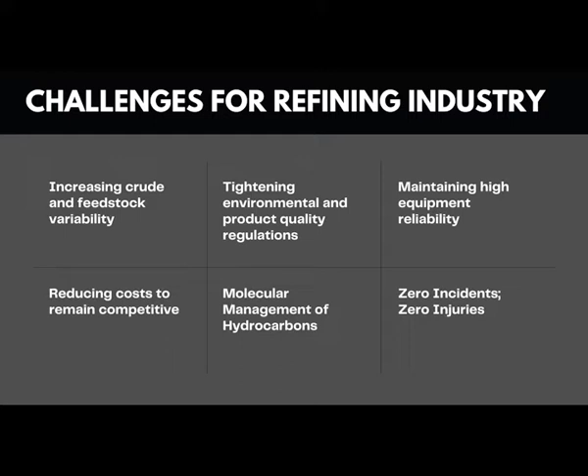The fifth challenge will be the molecular management of hydrocarbons. What does it mean? So today, splitting the crude oil into various petroleum fractions alone would not be sufficient. We need to come out with several petrochemical components either in the refining campus or in the downstream petrochemical campus. We have discussed at length about the petrochemical industry in the previous episode.

The petrochemical industry has got a huge demand and it is going to give high returns on the income. So according to the petrochemical industry's demand, several raw materials need to be produced from the refinery. The last challenge would be to have sustainable operations.

What does it mean? Zero incidents and zero injuries. So the workforce needs to go back home in a safe manner without meeting with any injuries or any fatality. So accordingly, all safety aspects need to be taken care of, whether it is personal safety or process safety. So these are the current challenges for the refining industry.

Today, technology has become so powerful. When we mean technology, it is all related to IT and associated technologies like mobility, analytics, cloud technology, security, social media, then drones, robotics, etc. So the technology has become so powerful. In the refining industry, we need to identify the right use case so that this technology can be leveraged to a great extent, so that these current challenges of the refining industry can be taken care of in a smooth manner.

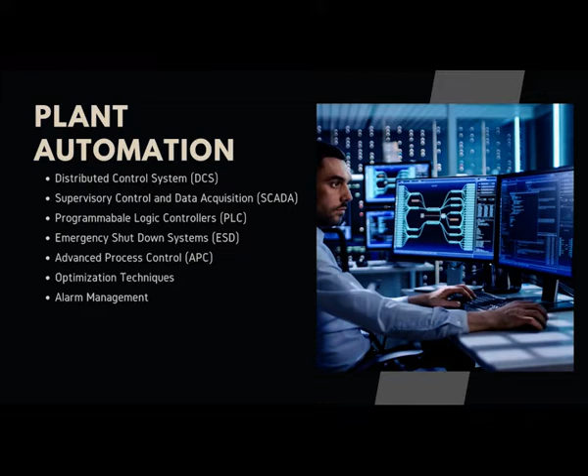So these are some of the basic stuff which are already in place, but today we are going to talk more about digital solutions, how the digital components can help the refining industry with the help of the technology. So first let us talk about analytics.

So today big data and analytics is a common topic across any industry, whether it is a banking or retail industry or an insurance industry. The oil and gas industry, especially the petroleum refining industry, is no exception to use the big data and analytics. So as I said in the previous slide, the refining industry generates a lot of data with the help of instruments. Not only from the instruments, we also collect a lot of data from the other assets like the fixed equipment and rotating equipment. So much of data is being collected, but how do we leverage all that data?

So only with the help of predictive analytics, we'll be able to leverage all the data that has been collected for so many years. For example, input from equipment through IoT devices predict the performance of rotating equipment. Today, the rotating equipment performance is monitored by condition monitoring and traditional techniques. But in the future, or in the digital refinery, all the rotating equipment data, especially the vibration data and associated data, will be collected with the help of IoT devices. The predictive analytics will be performed, and finally the troublesome equipment will be identified for further action.

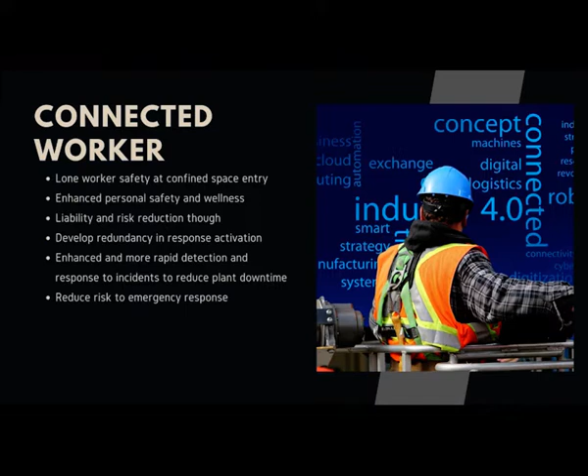Especially when workmen are working in a confined workspace, they need to be monitored, and the instructions need to be given in a real time fashion. So accordingly, the connected worker solution has got different kinds of features. It is going to enable more rapid detection and responses to incidents, to reduce plant downtime, and it is primarily going to reduce all kinds of injuries to workmen or fatality. And finally, it is going to help the corporate mission of zero incidents and zero injuries.

Then the next digital use case would be digital operator logbooks. In a continuous process plant, especially in a refinery, the operator logbook is a vital document which is used by the operators who are working in shifts. It is going to help the incoming shift operator to understand what is the condition of the plant and what are the tasks to be performed in the incoming shift.

So far, all these activities are happening with the help of a physical logbook, but going forward, all this can be digitized and digitalized. So with the help of the digital operator logbook, all data will be part of your asset management system, and at any point of time, you will be able to go back in time and understand what went wrong on a specific date or a specific shift.

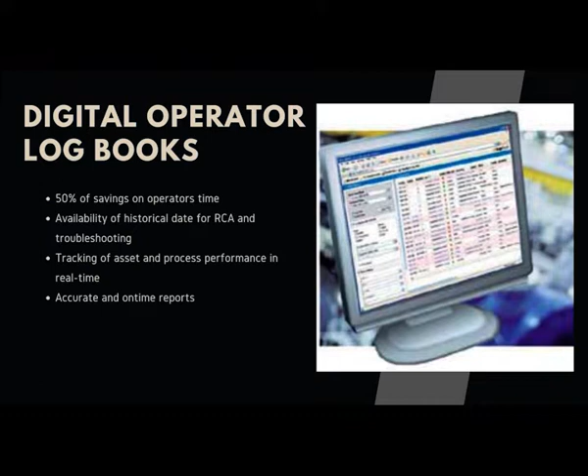So it is going to track the asset and the process performance in real time, and with the help of digital operator logbooks, you will be able to generate accurate and on time reports. And definitely, mobile devices can enhance the digital operator logbook when the operators have to go on rounds in the field.

The next use case would be offsite emergency management. Whenever there is an incident like a fire or a spill, immediately the necessary stakeholders will assemble and then they'll control the situation.

For example, the fire crew will be mobilized and the designated emergency crew people will assemble, put out the fire, and help the victims who are affected in the emergency. Sometimes the situations go beyond control, and at that point of time, you may require help from the downstream industry as well as the civic community.

For example, in India, whenever the offsite emergency is declared, the district collector will take charge and he will be the chief coordinator to control the situation. He will mobilize all the paramedics, he will help people to move out, and he will try to mobilize the forces like the police and other resources. So at this point of time, various stakeholders need to be connected.

So this is where technology is going to play a vital role. This solution will help to quickly alert the neighborhood industry in an offsite emergency situation and help to mobilize the civic resources, and including media, clear and accurate information can be shared.

Then comes the operator training simulator. Refining industry is a very complex industry, especially today. A lot of complex instrumentation, logics, interlocks have been put in place. Unless the plant people are trained appropriately, it is very difficult to run the refinery in a smooth manner. In order to train the operators in an efficient and effective manner, operator training simulators are becoming part and parcel of the plant automation systems.

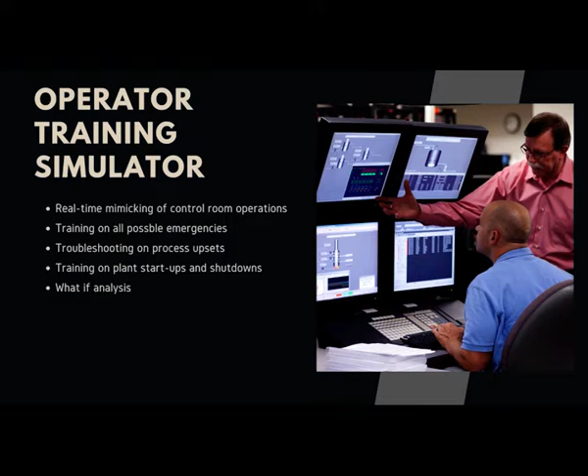When a new refinery is built, the EPC vendor is supposed to provide the operator training simulator along with the plant automation system. But going forward, for every plant inside a refinery, a custom model will be built, and even the operator training simulator would be accessed over the web. The plant operators need not spend time to come to the training center. From the control room itself, they will be able to attend the training programs.

These operator training simulators not only train the operators on different emergency situations, they are also going to be very helpful in training the operators for startup and shutdowns, where a lot of incidents are likely to take place.

Then comes the smart glasses as well as AR and VR technologies. These are all very specific use cases where the operator can be trained even if he is in the field. With the help of AR/VR technologies and smart glasses, the operator will be able to scan a specific equipment and get all the relevant documentation in a smart glass. He need not go back to the control room. He need not go back to the drawing room to fetch the drawing.

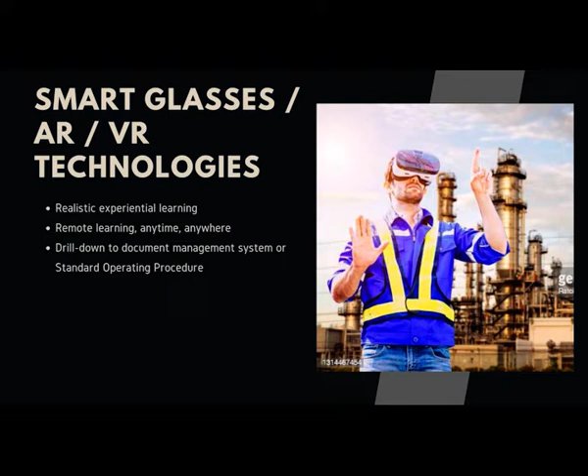Since all the drawings are digitalized, now with a click of a button or with a command, these drawings can be brought to the field, and accordingly the actions can be taken. So it is going to help the field operator to a great extent, and this is in fact going to help the operators to have an anytime, anywhere learning kind of experience.

Then we move on to another use case known as connected analyzers. Generally the streams of the petroleum refinery are all sent to the quality control lab for analyzing the stream for specific test methods. For example, the gasoline sample is sent to the lab for octane number testing. But there are specific scenarios where we don't want the time lag between sending the sample to the lab and getting the results. That is where we try to install online analyzers, especially when the refinery streams are sent to the downstream petrochemical industry as a raw material.

The continuous monitoring of the stream with the help of online analyzers is very important. But the flip side of having online analyzers is the need for dedicated resources. The technicians who are in charge of the online analyzers need to be trained in a systematic manner, and if these people leave the organization, then it is very difficult to maintain the analyzers. Any breakdown in the online analyzers is going to have a huge impact on maintaining the smooth operation of the refinery, especially when you are feeding the downstream petrochemical plant.

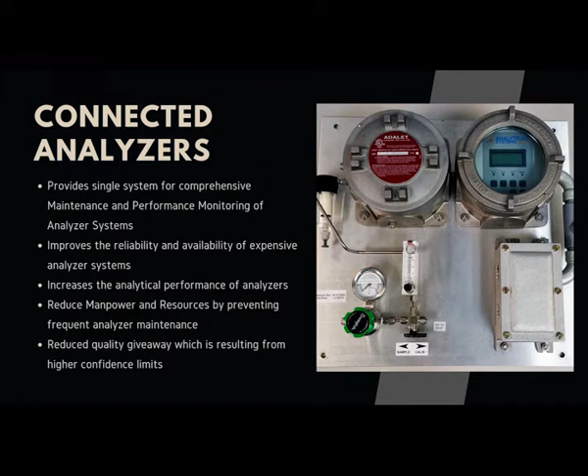That is where the connected analyzers come in and help the refiners to maintain the health of the analyzers. With the connected analyzer solution, you will be able to monitor the performance of different analyzers, however they are spread across different locations. So the performance can be monitored, it will be easy to predict their performance, and the troubleshooting can be done in a seamless fashion.

Then drones. Once upon a time, drones were not considered a technology that could be used in a refinery. But today, refineries are trying to leverage the power of drone technology, especially when they want to do inspection in places where human intervention is difficult.

For example, refineries generally send all their liquid products through pipelines to their terminals and depots. So the integrity of the pipeline needs to be monitored, and sometimes that is the responsibility of the refining companies. With the help of drones, the pipeline can be monitored. Any third-party movement can be detected, or sometimes with the help of analyzers, you will also be able to find any leaks happening in the pipelines.

Similarly, flare stack operations can be monitored with drone-based inspection. Generally, the flare stack is inspected only during turnaround maintenance, which happens once in 3 or 4 years, depending on the size and complexity of the refinery. But with drone-based technology, the flare stack can be monitored, the flame pattern can be detected, and any deterioration in the flare tip can be actively monitored and attended to in a proactive fashion. That is where drones are helping the refining industry to a great extent.

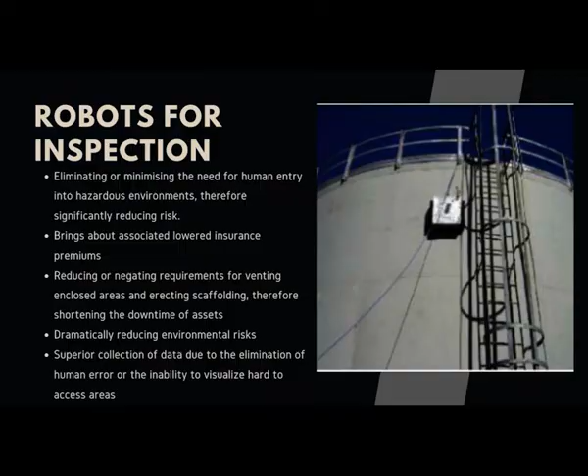But today, to solve that specific challenge, there are robots for inspection, known as crawling robots. These crawling robots can scan every piece of the plates in the tank wall and across the 360-degree circumference of the tank. So every part of the tank can be inspected for any leaks or gaps in the welded joints, so that the reliability of the tanks can be ensured. That is where the industry is leveraging robots to a great extent.

Then robots can also be deployed for firefighting. In a refinery, though we have trained people, fire tending equipment and firefighting engines available, depending on the intensity it is sometimes very difficult to put out the fire. So we need to allow the hydrocarbon to burn fully so that everything is under control. But this takes time, and in the meantime a lot of equipment, machinery, and sometimes even manpower can get damaged.

In order to address these challenges, robots are now put in place for firefighting. These robots can be triggered with the help of pictures sent by the drone. For example, once a fire alarm is activated, the drones can send the pictures, the firefighting robots can be triggered, and immediately mobilized to the specific location in the shortest time possible.

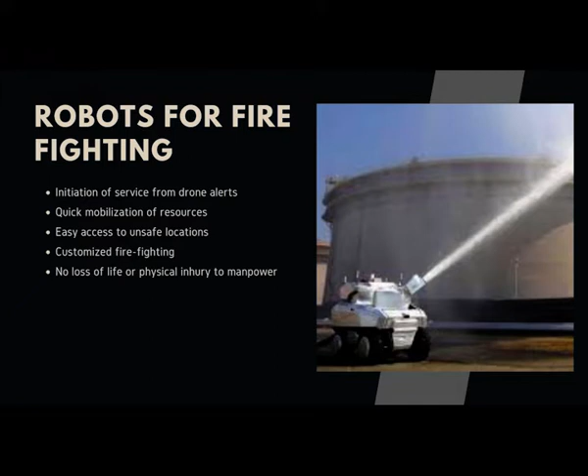They are all tested for withstanding high-pressure water jets, and they can change the angle of the water jet and adjust the spray nozzle. All that is possible depending on the situation, adjusted in real time, and with the help of a remote control these robots can be maneuvered, so firefighting can be done in a very efficient manner. Then comes robotic process automation.

Robotic process automation does not involve a physical robot as in the previous two use cases. We talked about robot-based inspection, especially tank inspection, and robots for firefighting, where physical robots are deployed. But robotic process automation is actually a software solution to take care of the repetitive and voluminous activities happening in an industry, and it can be extended to the refining industry.

For example, a big company having multiple refineries will have a very complex procurement system, and procurement happens globally. A lot of manpower is involved in receiving the quotation, processing the quotation, doing the vendor rating, the order placement, and finally making the payment based on the invoices.

A lot of manual work is involved, and all this manual work follows a certain workflow pattern, and these jobs are repetitive in nature, and the volume of tasks is very high. This is where robotic process automation, or RPA, can find a place, and this will drastically reduce the manpower, and since they are all automated, the final output is very accurate, and you can safely rely on it. You are going to have an error-free business process in place.

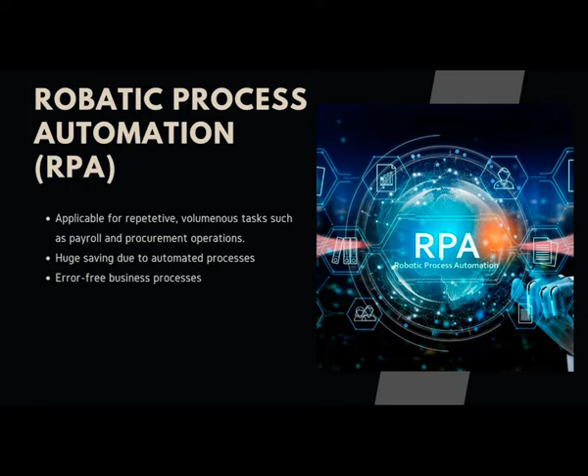So today, many of the refineries have started deploying RPA in their procurement process, payroll process, and HR functions where repetitive tasks are performed. This is going to reduce your cost of regular operations, and finally it is going to improve your gross refining margin.

And finally, we have the integration portals. Of course, portals are part of refineries even as of date. But going forward, the integration portal is going to connect all the key IT applications. For example, to start with the plant automation system like your DCS and SCADA system, not all the information from the plant automation will be brought into the integration portal.

For example, the temperature and pressure may not be relevant for all the stakeholders. The planning engineers or the top management will be more interested in knowing the crude oil throughput in the refinery and the product yield patterns. So most of the flow related information will flow into the integration portal.

And of course, from the enterprise asset management system, the downtime of the equipment under repair, the cost of repair, mean time to repair, all such KPIs will be part of your integration portal. So apart from the plant automation system and the enterprise asset management system, inputs can come from your laboratory information system, known in short as LIMS, and then HSE applications like your incident management system, etc.

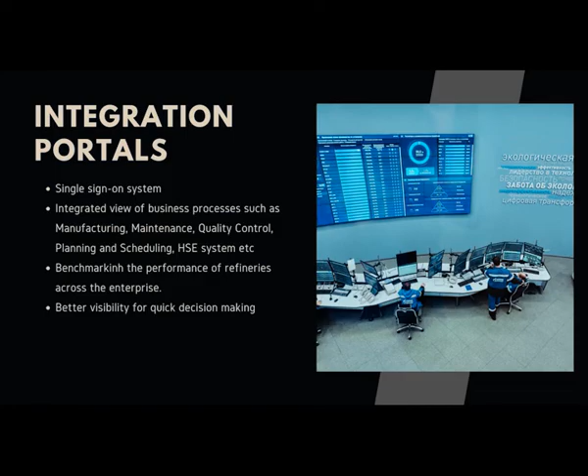I have just given a few examples of the digital use cases, and definitely when the right stakeholders, for example the technology vendors, domain experts, and the end users, combine, they can identify more and more use cases. Finally, the benefits of a digital refinery are increased market opportunities, increased plant availability and reliability, and increased yields. And on the other side, it is going to reduce inventory cost, improve personal safety, and increase personal efficiency.

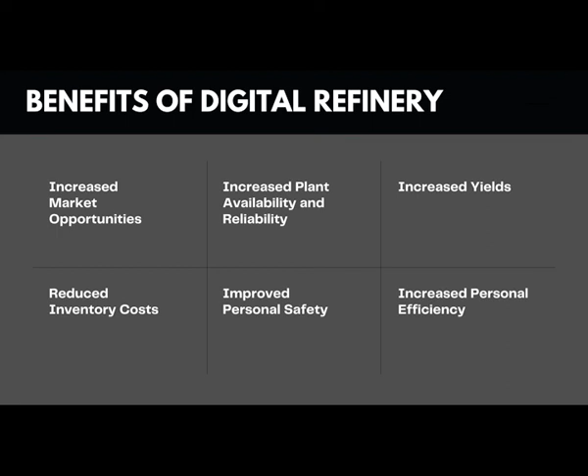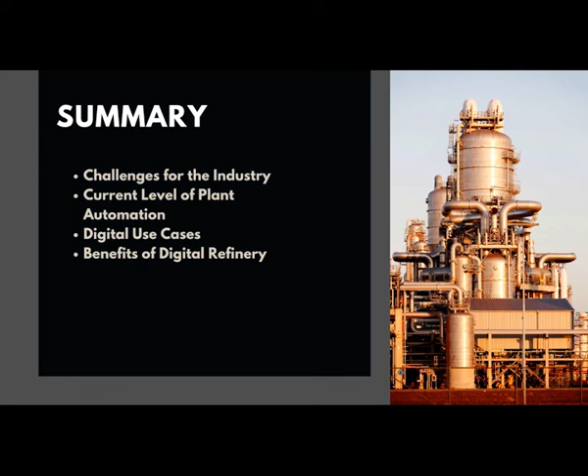So that is what is going to be called the refinery of the future, or digital refinery, which is going to leverage completely all digital technologies, starting from mobility, analytics, cloud, robots, social media, security, drones, etc. With that, we conclude the session on petroleum refining. I hope all these modules will help you get a clear understanding of the petroleum refining industry, their business processes, and how it is impacting our economy.